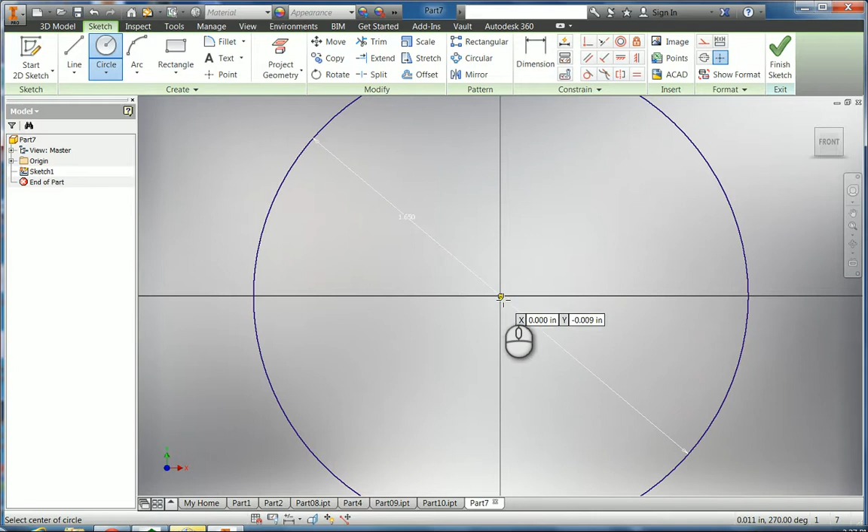Okay, we're going to work on part 10, the tire. Start a sketch. And we're going to start out with some concentric circles here. We'll go at 1.650 for the outer edge one. Then we'll go, let's see, 0.1 in would be 1.550.

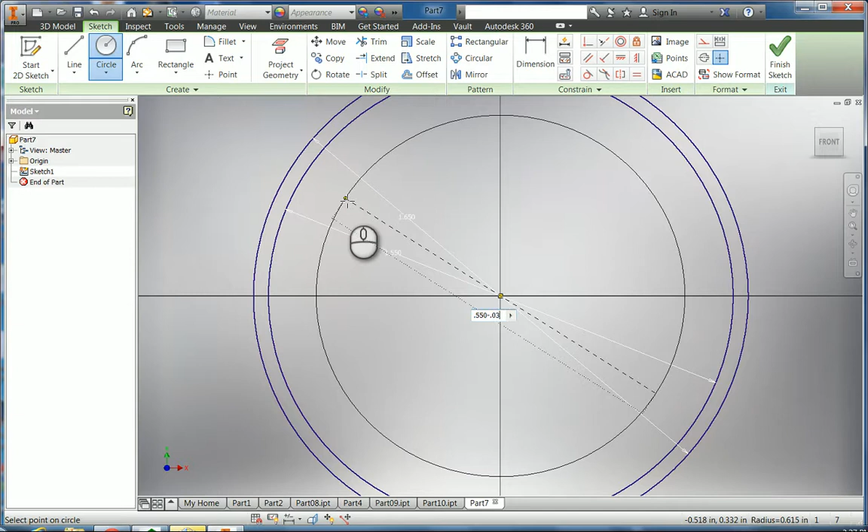And then we want, let's see, what is it, 0.03. So 1.550 minus 0.03, whatever that is. That's good. Okay, we got enough circles there now. I'm gonna go ahead and finish that sketch.

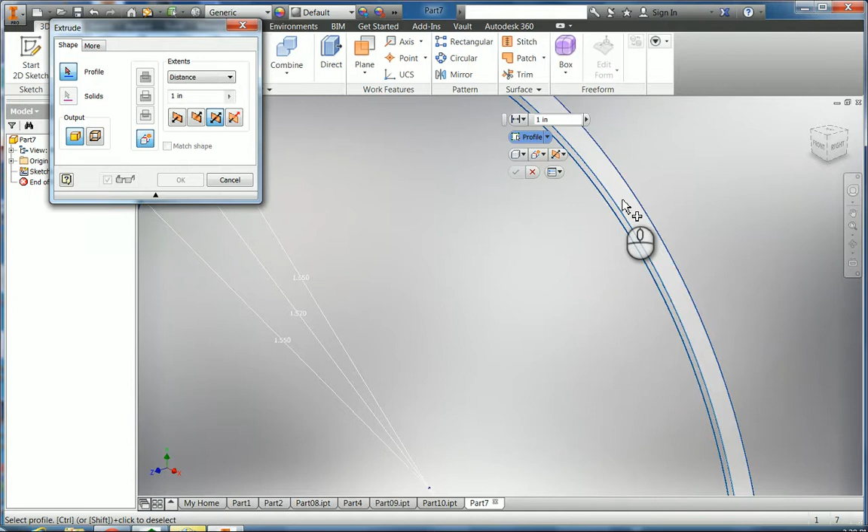We're going to extrude, and we're going to pick this outer one here. And first of all, we want this one right here. We want a mid plane, so we have a plane that goes right down to the middle of it. That'll be nice. Click that, and that's supposed to come out 1/2 inch, I believe. 0.5 inches. So it'll basically be putting 0.25 inches on either side of the mid plane. Okay, so we got that.

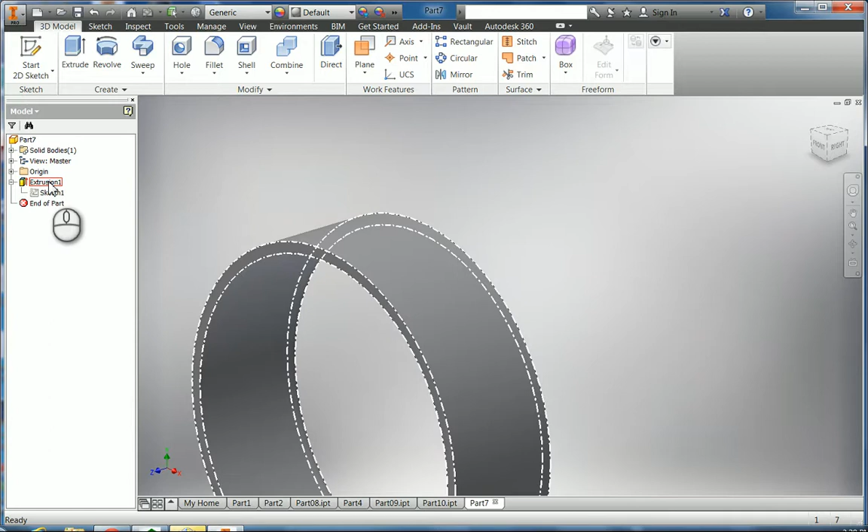Okay, we want to do some inside ribs. So what we want to do here is that sketch that we just made was consumed by the feature, the extrusion feature. So we want to open up the extrusion feature. We want to right click on the sketch, and we want to share that sketch. So it puts another out here that we can use then. So I can come here and come to this sketch, and I can edit this sketch, which is nice.

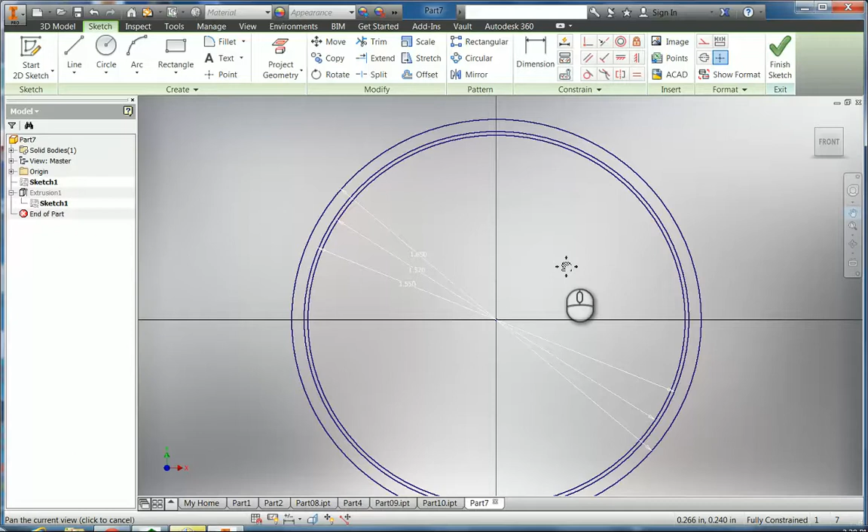So the first thing I want to work on is I want to make those ribs that go all the way around the whole thing. So the way I'm going to do that is I'm going to get a line, come here, come up to about here, good, and I want it to be, let's see, 4 degrees off either way, so 94 is good. And I'll make another line. Comes up here. 86. So I got those two on there.

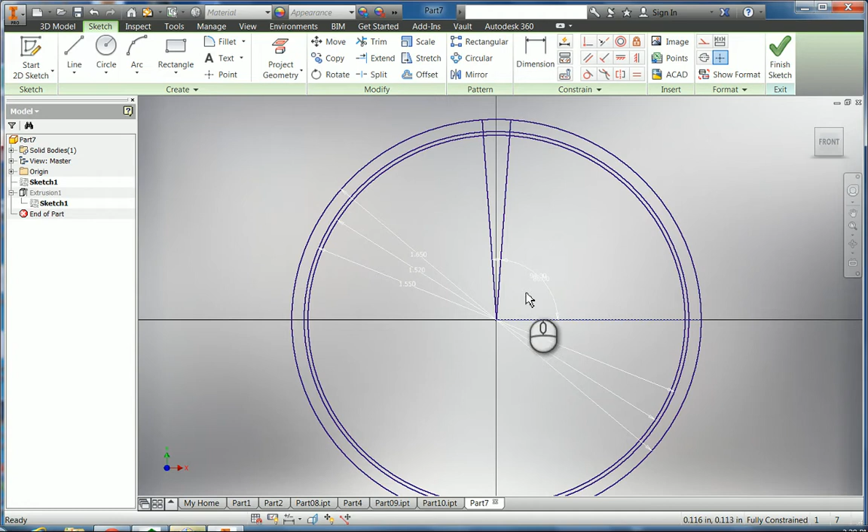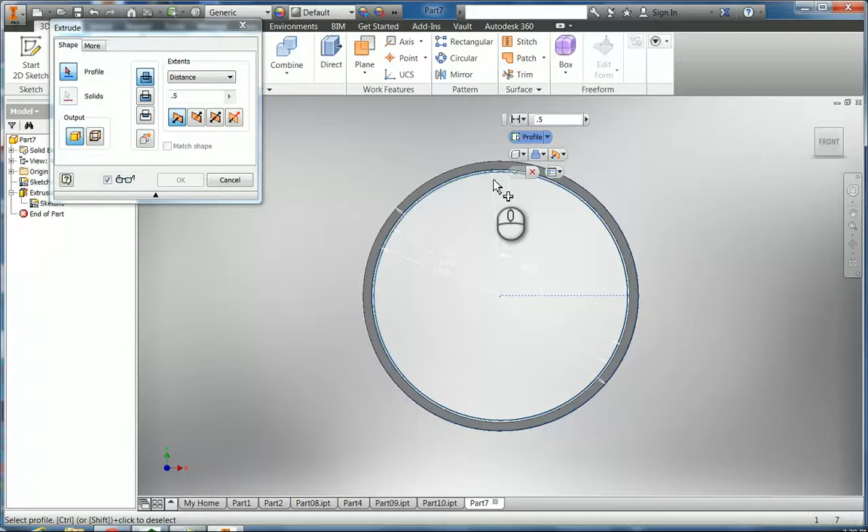And I'm going to zoom in a little bit up here on the top. And I'm going to click my trim tool. I'm going to trim that and that and that and that. So I have this little box right here, which I'm going to extrude to make a rib. So I'll finish the sketch. I'll click extrude. I need to come in here, see where it's at. And right there I get that highlighted. I'm doing a mid plane again, all from that mid plane. And this is going to be 0.4 length. Okay, so I got that out there now.

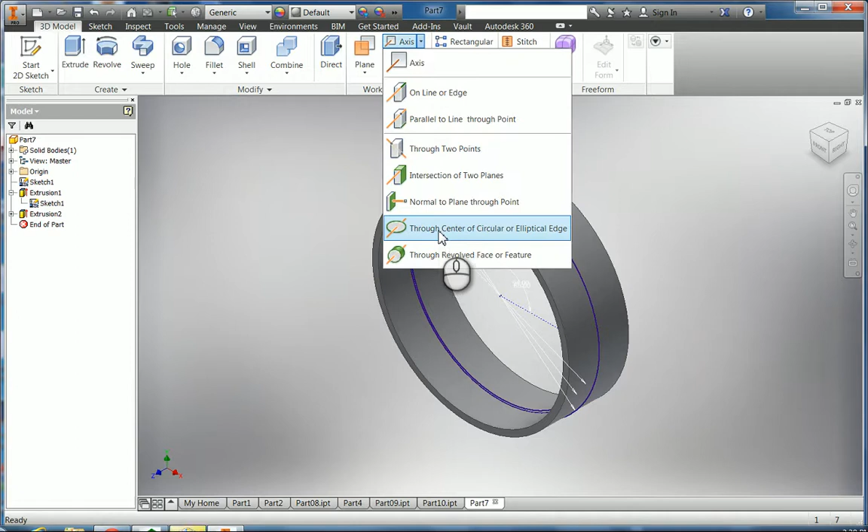Okay, let's move this sort of like this. So I'm going to circular pattern that all the way around the inside. So I need an axis through here in the middle so that I can circular pattern it around a reference axis. So I'm going to do an axis, and I'm going to get this through the center of a circle. Click that one, and all I have to do is figure out a center. See if I do a center, either that one or that one. It doesn't really matter. They're both going to give me the same thing. So I'll just click on that. So now I have an axis going through there that I can use to circular pattern.

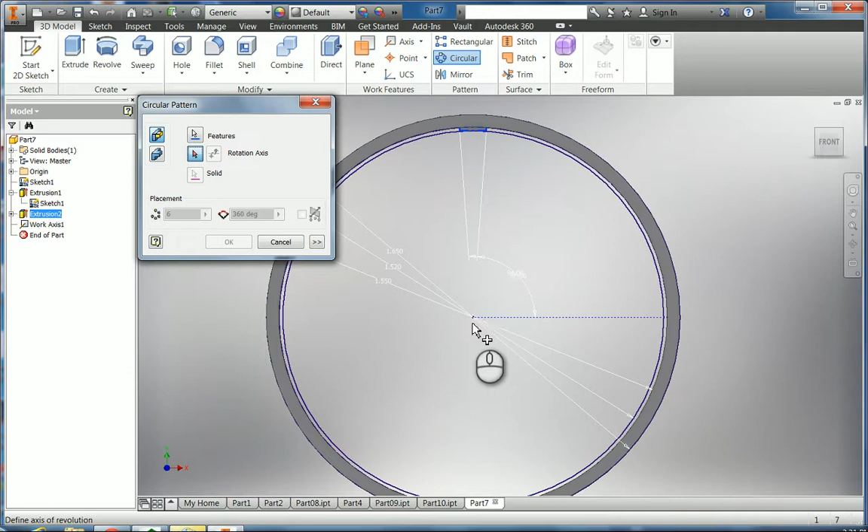So if I click this again, and I click the circular pattern, it says to select your feature. I'm going to select that rib right there. Then I click on the rotation axis. I'm going to go around this axis, which is coming straight out at me, but if I click on it, you see it turns yellow, so I can click on that. And that puts them all the way around. Now I want 15 of those around there, so I'm going to click 15. Click OK, and now I got them all the way around. Now I'll move that around so you can see. So they're inside there now.

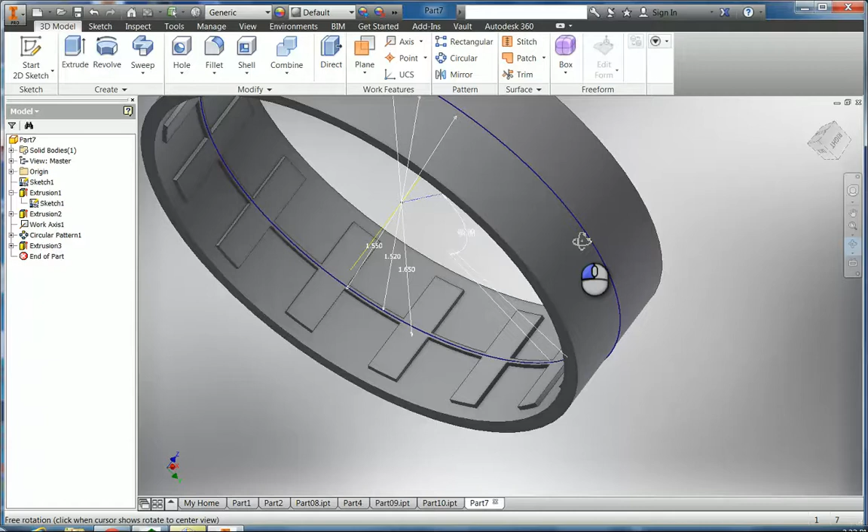So all I have to do now is do that little center rib all the way around. And so the way I'm going to do that is I'll hit extrude, and if I zoom in here a little bit, I still have that one right in there. So I'll click that, do the mid plane, and we're going to go 0.02. Click the green check mark and zoom out a little bit. See if it looks like what we want. Whoop. So there it is, and I got a nice little rib around through the inside.

So there's some things on here that you might not want to see visible. I don't usually like them, like that axis right there. So I come over here, I find that axis. There it is, the work axis. I right click on it, I turn the visibility off. I got a lot of sketch lines on here still, so I can come up to this sketch right here, turn visibility off on that, so I can have it that way.

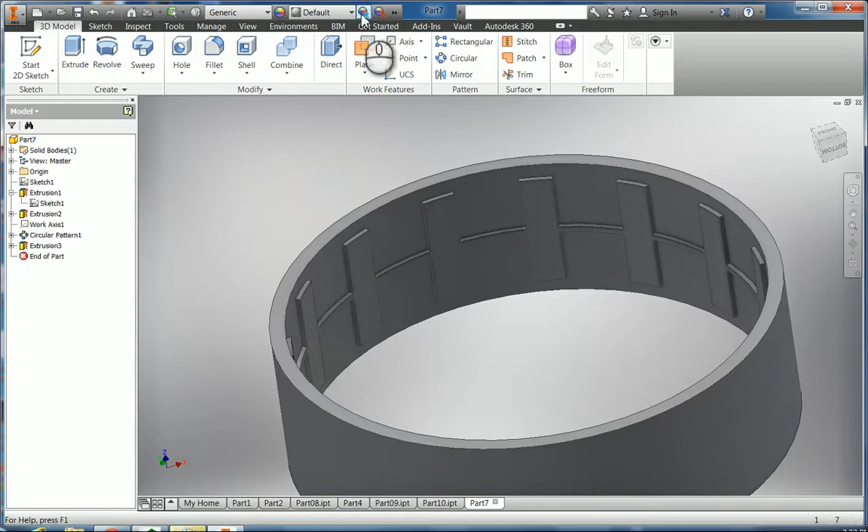I could come up here, click on the color thing, try to come down here so that it's all like that. Click on green maybe or something, and there you go. The wheel is all done. Of course, you need to try to emboss your initials on it somewhere.